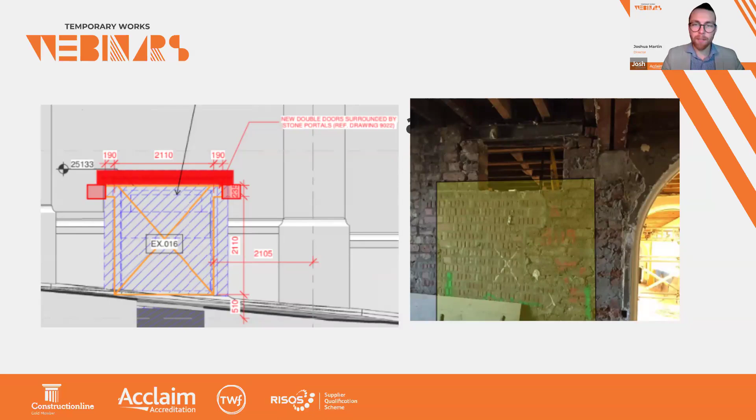So it can be supported in the short term. But why can't we just knock the wall down and whack a beam in quickly? The reason is the beam is usually installed to support the structure above, which could include a wall, floors, beams, roof, arches, or anything like that.

But this comes with quite an important caveat: it relies on the wall above arching over the opening. Masonry is able to arch even though it's just a flat soffit or opening - the masonry will arch around. It's important to understand that for larger openings, or openings where there's not enough masonry around the support areas to enable this mechanism, then this method doesn't apply. This 60-degree zone doesn't apply, okay?

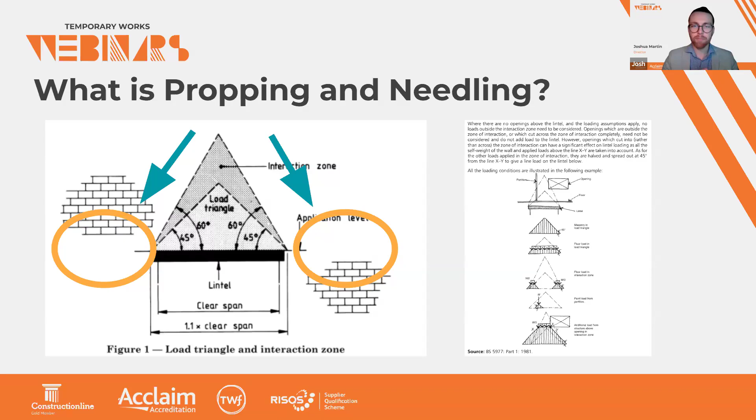Okay, so let's look at the type of things that need to be considered when we are propping and needling. The importance of site investigation is absolutely critical. It's really important that we know what the structure is and how it's currently behaving, so that we can predict what it's going to do.

And it comes down to - yes, we're only less than 20 minutes into the presentation, ladies and gentlemen, but I'm going to say it - it's GIGO, my favorite phrase, I'm afraid: garbage in, garbage out. If the idea of the solution is based on garbage, then the solution itself is also going to be a load of garbage. Proper site investigation is required, and a little thought and money spent at this stage will really make for a much better solution.

Okay, next point, lateral stability. Before the wall is removed, the lateral stability of the propping and the floor itself will need to be considered, yes, support of other structures and not just the wall in question. So don't forget that adjacent floors may need to be supported to remove the live load from the wall and to reduce the amount of loading on your propping and needling. That needs to be taken into account.

Next one, the whole sequence of construction and not just the propping - that's important as well, for a couple of reasons. The very first being the loading of the temporary works. The system needs to be designed for the worst case loadings. Therefore, if the structure is going to be loaded by plant or materials or some kind of storage, snow, potential vehicle strikes during its design life and not just at the time of installation, then this needs to be considered at the design stage.

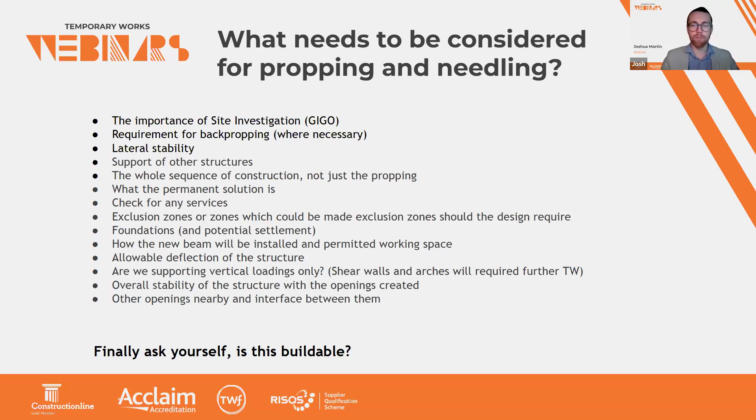And then finally, we need to ask ourselves: is this solution buildable? It's really important that the design from both the permanent works and the temporary works is buildable and suitably mitigates risk using that ERIC principle of eliminate, reduce, inform, and control. Openings in load-bearing structures can go seriously wrong if not carried out correctly, so the overall solution must be safe and the sequence of construction must be practical and be able to be done on site safely. So let's use this example to explore some of those points.

So let's take it through our list. We've got site investigation - we're looking for wall thicknesses.

Layout of the structure, including floor spans and floor to ceiling heights, floor construction, so we know and understand what the load is. What's the floor made out of, and will it be suitable to support the point loading from the props underneath, which leads us on to back propping.

Is it feasible to back prop below? The floor below may well be occupied by a third party or restaurant that is currently open, so we need to make sure that we understand if we can back prop, and if we can't, then that leads us to other solutions.

Lateral stability and the support of other structures. So we have an arch here. Will that be supported by the needling? If the wall is acting as a shear wall to provide that stability to the whole structure, do we need to consider global stability as well as the local stability of creating this opening?

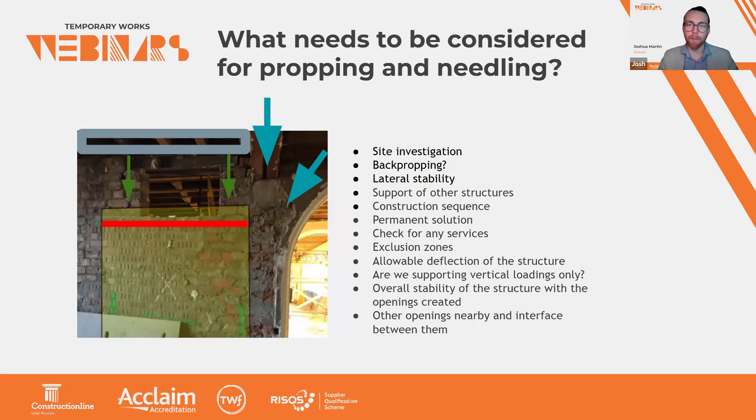There are other considerations that will be project specific, but if you plan ahead and start discussing these concepts and schemes, then the work should go nicely to pick up all those constraints.

So now that we know the types of things that we need to consider, it's time to furnish our temporary works toolbox, an imaginary one unfortunately, with all these different ideas that we can utilize in our project. That way, when a particular solution, challenge or issue comes up, we can already have in mind lots of solutions that we can run through that would work and employ in that particular project.

I was reminded the other day by a colleague of mine that a craftsman may well have some really good and sharp tools, but if they don't know how to use them, then they're going to create something quite blunt and ugly.

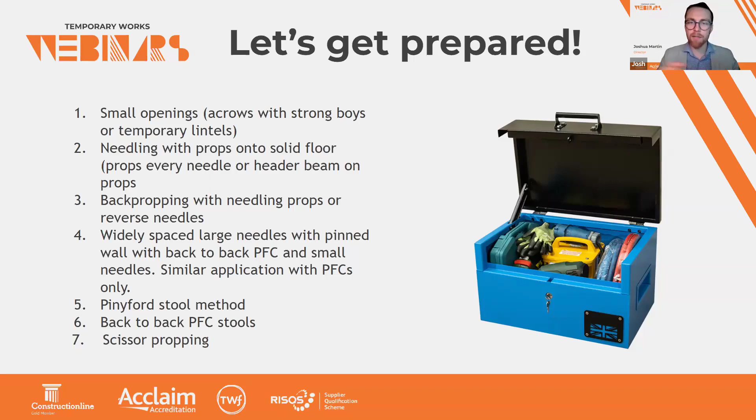As shown on the list here, there are several different types of propping and needling schemes we can employ. Sometimes a mixture between them is most appropriate, but we're going to look at 7 today which are most common. This is more on the domestic side, smaller openings which are quite common. We're talking about a maximum wall thickness of around 230 mil, or double skin cavity wall, and openings up to 2.5 meters or so.

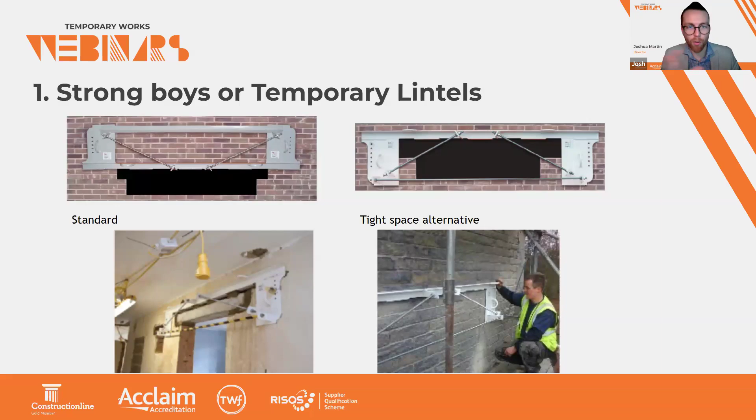The first example is a no more prop solution, or temporary lintel. It's a single tool that replaces the need for multiple Acrow props, saving lots of space on site and site prep time on the ground. It's an off-the-shelf product, great for small-scale applications. It does rely on masonry arching, which we discussed earlier, so it needs to be on a long wall. But it's quite handy in particular examples.

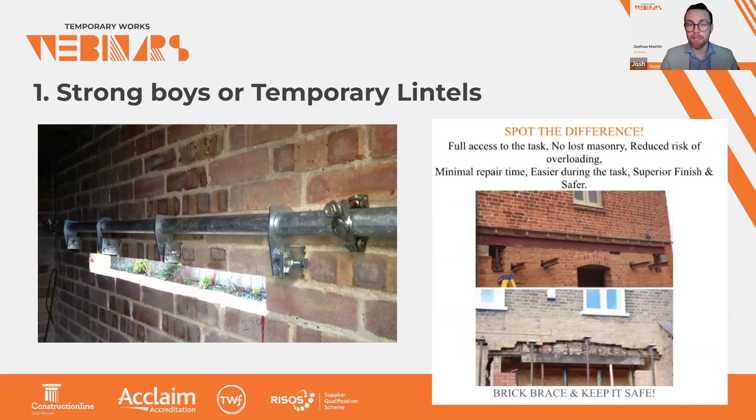Brick brace is a similar proprietary item. It's quite a clever system that effectively uses technology similar to post-tensioning structures. It's like a scaffold tube with fixings at regular centers. Those fixings have plates which go into the masonry vertical joints, which are then opened out with the plates, and which compresses all of that bottom row and creates a deep beam. Essentially, it's quite a clever and neat solution.

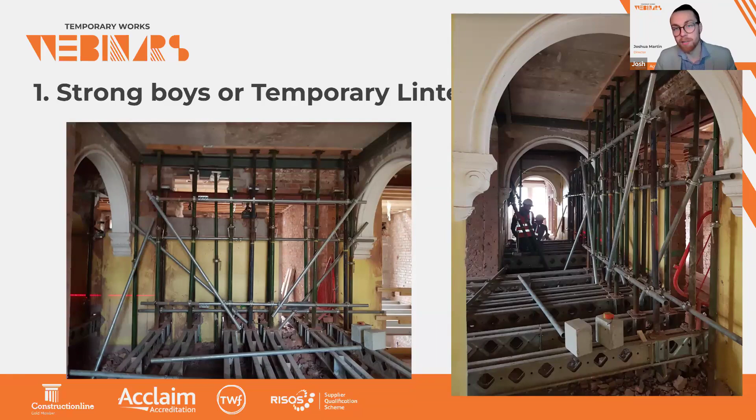And now for the strong boys. These props are for a similar application as the no more props, as the prop head attachment is only good for a safe working load of 350 kg - that's an unfactored capacity of 350 kg. So we're talking quite small scale here, and they're often used at very close spacings because of that limited capacity. We have a steel head plate attachment, cut into the wall at regular centers, supporting the brickwork.

An example of this propping scheme is shown in some of those pictures. The row of props closest to the wall has the head attachments on top, cantilevering into the wall to pick up that wall. The row further away from the wall is supporting the floor above, to remove some of that loading away from the opening, and the loading was only on one side because the floors on the other side of the wall spanned the opposite way.

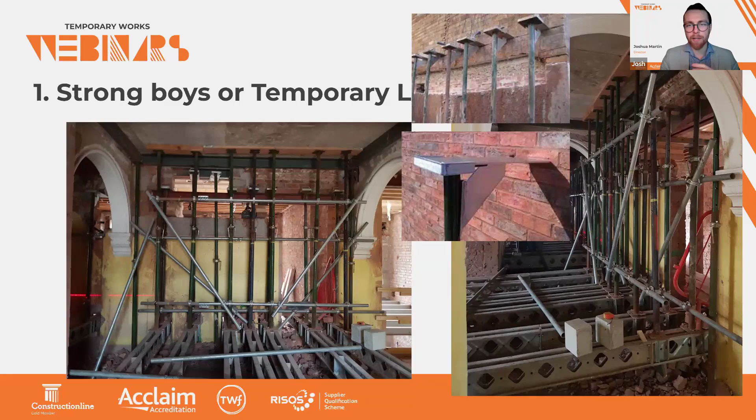The propping was founded on some aluminium beams that then spanned over the floor to put the loading back into the load-bearing wall. We can see these concepts illustrated here - on the left is a simple scheme where the props are supported on floors, and to the right where we've got a very weak floor alternative.

Most often the loadings we get from strongboy props are low due to their low capacity, thus propping down to an elevated floor is usually acceptable, providing a proper load assessment has been carried out and we put some timber scaffold boards beneath. But understanding the floor spans and construction is critical, which links back to that good site investigation. This system is also good because the props are all on one side of the wall, so when you come to put your beam in, you've got one side totally open, and it's easy to use your equipment to get the beam in.

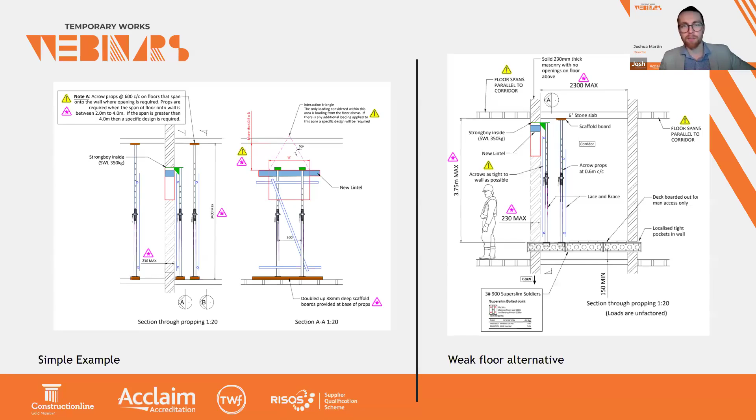If we review that against a typical sequence of installation, which applies for all lintels really - the propping of the opening is installed to fully support the wall. At that point, an opening is made to receive the new beam or lintel, and this doesn't have to be the whole wall - it can just be a slot, just big enough to get the beam in, allowing it to be supported by the pad stones, which are installed as well. Once the beam and lintel are installed and dry packed to ensure it's ready to take the load, the temporary works can then be removed, and the wall demolished. That's the process in a nutshell.

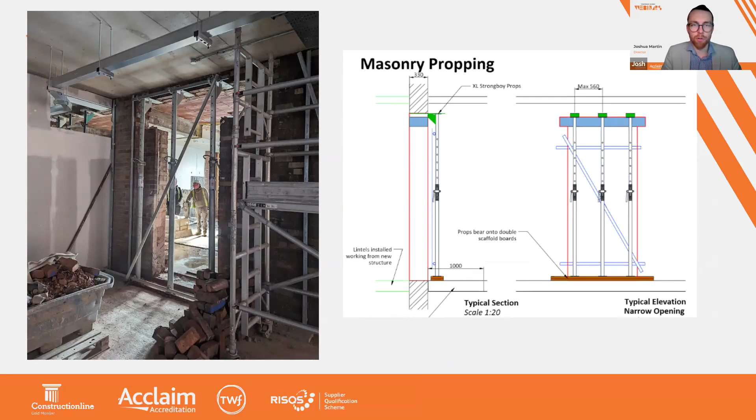Here's an example of that in practice. It's quite a neat solution there. There's a competent team on site: when you look at the drawing and what's been constructed on site, they're pretty much exactly the same. That's a neat solution, a very common practice: Acrow prop, strong boys, and some scaffold lacing to maintain stability.

If we're putting some larger openings together, this could be a thicker wall or higher floor loadings or something similar. We would employ something similar to what's shown here, so we've got larger needles. The needles are the horizontal beams which run through the wall and needle through it. Those beams are size dependent on the load. On this particular item, we've got vertical props coming down at the support of every single needle, so it's regular supports down to a structure which can support the load coming through.

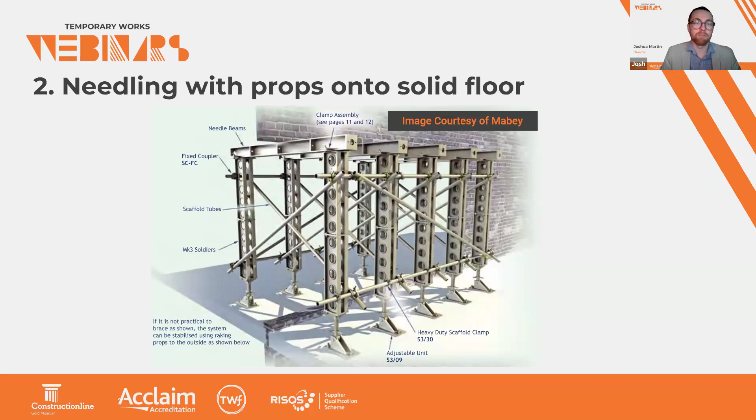The scaffold bracing doesn't have to go through the opening like shown here. Presumably on this schematic that's added afterwards just to provide a bit of stability, because when you're erecting it there is no wall there in place, which is why we can typically put in a raking prop, such as shown on this solution here, just to provide that lateral stability.

An alternative to providing a prop on every single needle is to have a header beam between the two props and to support your needles from those. The centers of the needles remain the same, because it's really important that we pick up the structure at least 800mm to 1 meter centers to maintain support to the wall, so we don't get lots of loose brickwork dropping down. We're providing lots of regular supports, and then we can have a header beam under those needles, with some strong props either side to support those. That enables quite a large opening, which may well be useful as a kind of goalpost solution to allow access or small plant to run through, etc.

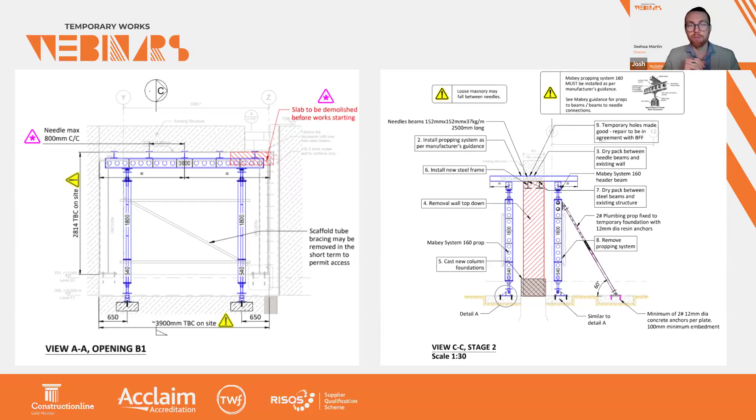If we are propping an opening on a raised floor and the floors are weak, then we can employ something called reverse needling. This scheme takes the load from the wall, distributes it to the needles, into the props, and back into the lower needles, and then back into the wall, just like that.

This is a really great idea, as when we are working on structures and changing how they behave, we try as engineers not to mess around with the load path so much, because we're putting stresses on the structures which we don't necessarily know they've experienced before, which may well lead to cracking that we want to avoid. So if we can keep the structure behaving as it has its entire life during this process of making an opening, then that's a great idea, and that's what this scheme is all about really.

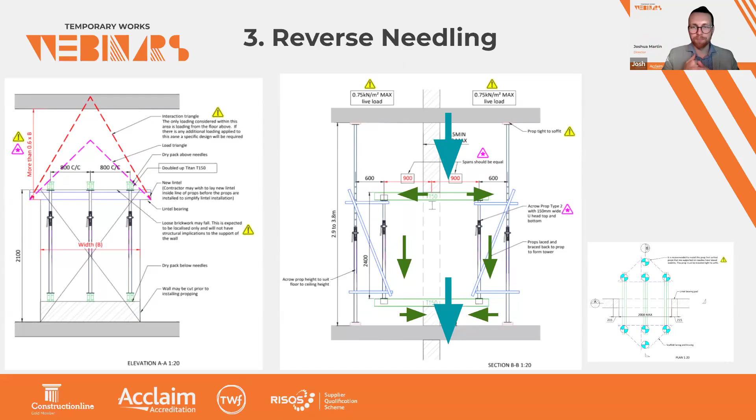So the propping from the floor to the ceiling is used, and that's just for stability really, because we've almost got like a floating frame. The propping is non-load bearing, it's just something strong enough to tie to. It doesn't have to be a prop if there's something nearby, scaffold or something, it's just to provide a bit of stability. So that's a really neat solution, reverse needling there.

Now let's look at needling with larger beams and with a pinned wall. This is a scheme where the loads were really high as we were supporting the whole facade, because the opening was all across the shop front there. The area beneath the propping was also required to remain open to enable the demolition works. Therefore, I developed a scheme that had props at approximately 5 meters apart.

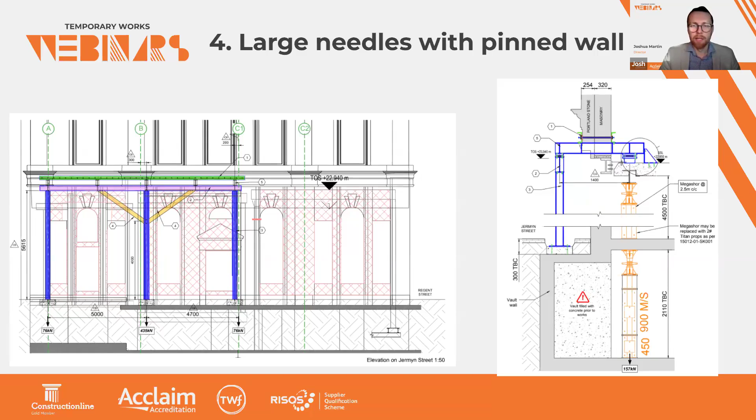Then we had larger needles at 2.5 meter centers, and back-to-back channels spanning between the needles to pick up the wall, which you can see a bit closer here. The PFCs are essentially strengthening the bottom line of that wall and are designed to span between the larger needles. A sleeved rod is inserted through the wall, which then ties the back-to-back PFCs together, a bit like that, which we've got a close-up of those needles and the pins.

It's important that the sleeve is used, as the rods themselves have quite a low bending capacity, and this is quite a high load in a thick wall. So we use those kind of sleeves over the rods just to provide that extra support in bending.

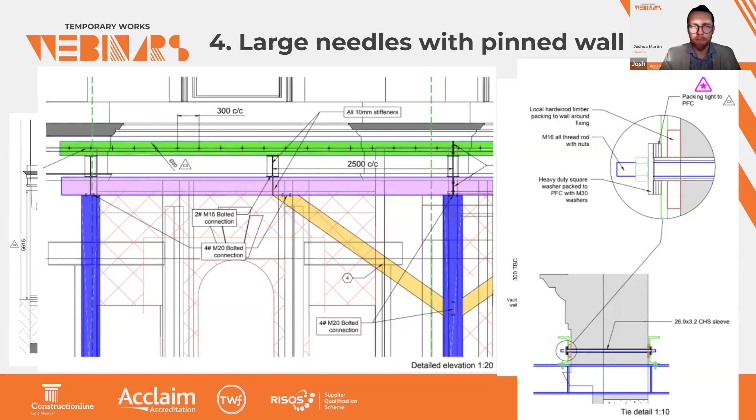Due to the size of the loadings and the quite awkward site constraints, it was necessary to go with a bespoke fabricated steel solution. This PFC pinned solution can also be used to limit damage in the wall, which was quite precious to the client. We proposed lots of different solutions, and they felt this solution was most appropriate to limit damage to the wall, so we could maintain as much of the fancy stonework wall as possible.

Next is the Pinyford stool method, often used for casting an in-situ beam inside a wall over a proposed opening. The illustration shown here is taken from the Temporary Works Toolkit, Part 10, published by the Institution of Structural Engineers. They've got a series of articles, and this one is primarily aimed at assisting the permanent works designer with temporary works issues.

This sequence breaks out in stages how to form a new lintel in an existing wall. The sequence is to break out pockets in the wall and insert small stools, usually steel box sections or cut-down steel I-sections. Once the stools are in and dry packed, ready to take the load and support the structure above, nice and tight, then the lintel channel, which is the extent of where the lintel will sit, is created.

That forms a large slot along the wall, which is then used to form the rebar, and the new lintel is placed inside, i.e. all the steel fixings are carried out. Shutters are placed around the slot and the concrete is cast. The top of the beam must be dry packed so it's tight to the soffit, ensuring it's bearing against the top of the wall with no air pockets during casting. Once the concrete's cured, we can remove the wall underneath, and hey presto, the opening has been created.

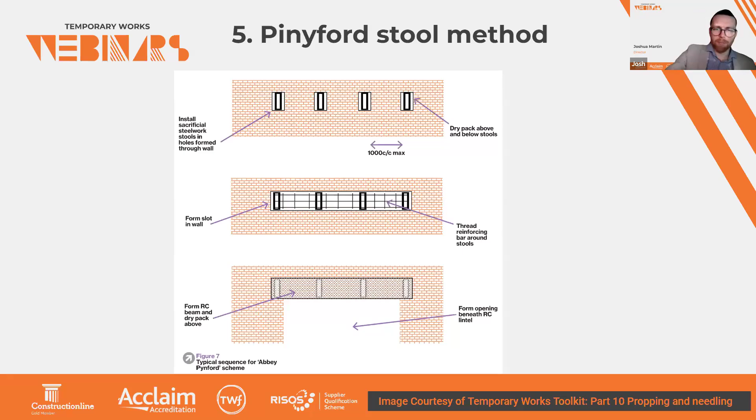I've got an example here of a design where we used the Pinyford stool method during the Low Cross project in East London. We used steel stools designed to sit inside the new lintel and therefore not clash with any of the reinforcement used for the new beam.

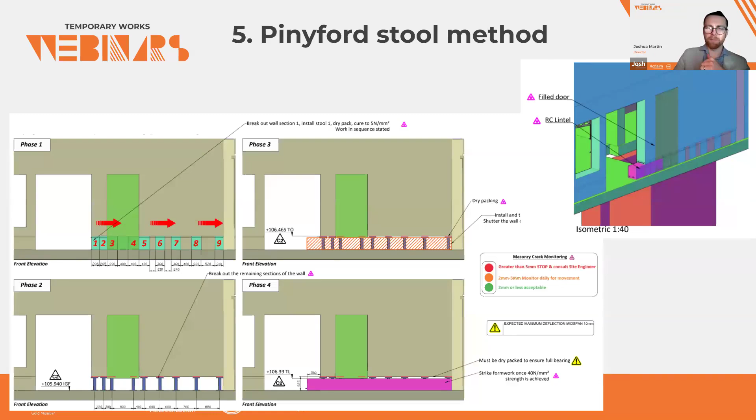The process was, as you can see here, to make the pockets, install the stools, then form that slot, which enables you to put all the rebar in to form the lintel, and then cast the concrete, let it cure, dry pack, and make the opening. It's quite a neat solution. Here's a detailed view of the stools and how they sit around that reinforcement.

It's really quite a niche method, but it's a very handy one to know because for certain challenges or certain requirements, this solution is just perfect.

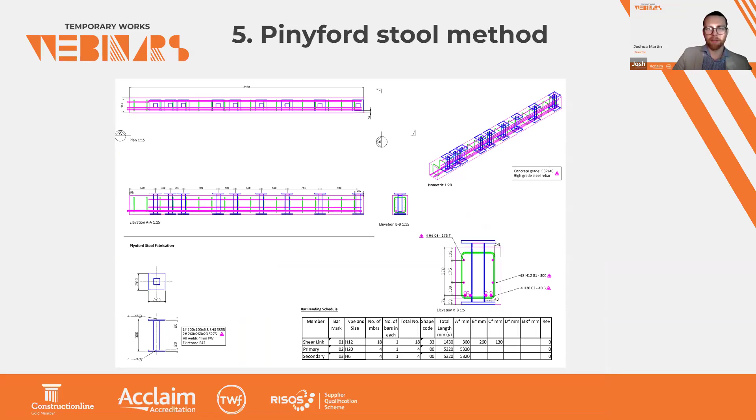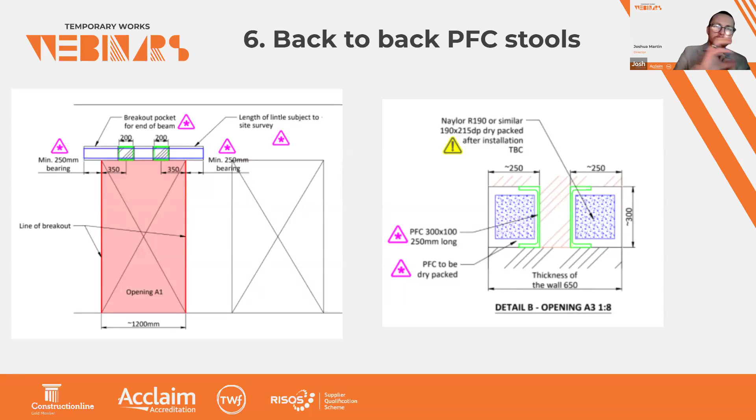In a similar vein to the Pinyford stools method, we can use back-to-back PFCs as little stools. They are very short stubs, back-to-back, and they allow the installation of precast lintels because they sit in the opening that the PFC stool channels provide. Those channels are a perfect shape for that, and they're done one side then the other - handed - and it's a great solution if you've got a number of precast lintels to install because you can do one side at a time.

So I'm going to show you a typical opening and the sequence of the back-to-back PFC stools method. We have a typical opening here, and you can see the load interaction zone and the proposed location of the stools shown in those three hatched blocks. They are short stools - just short sections. If we take a section through this, we can see the sequence of that installation.

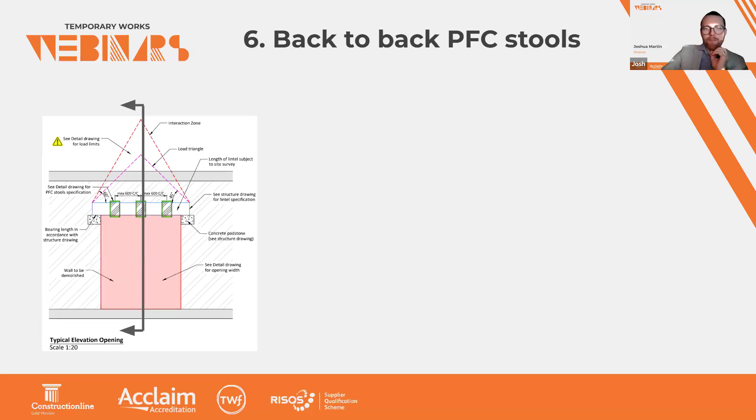The sequence is similar to the Pinyford stools method. However, as this sequence allows multiple lintels to be installed side by side, one side is usually done first, which is then completed and totally load bearing, enabling you to carry out the other side. This ensures that the wall receives as much support as possible throughout the works.

And here's what we do: we break out the pockets and install the stools on one side, then dry pack the stools so they're nice and tight and load bearing. Once they are load bearing, that means we can form a slot on one side of the wall and install one of the lintels. We dry pack that lintel, making sure it's now ready to provide support.

Which means that we can do the same on the other side of the wall, until we've got full support along the whole wall, at which point we can sign off the permit to remove that wall top down, and then we have our opening.

It's a really neat solution. The ends of the steels are usually just cut off or boxed in. But as I say, this back-to-back PFC stool is quite a niche methodology, not very common.

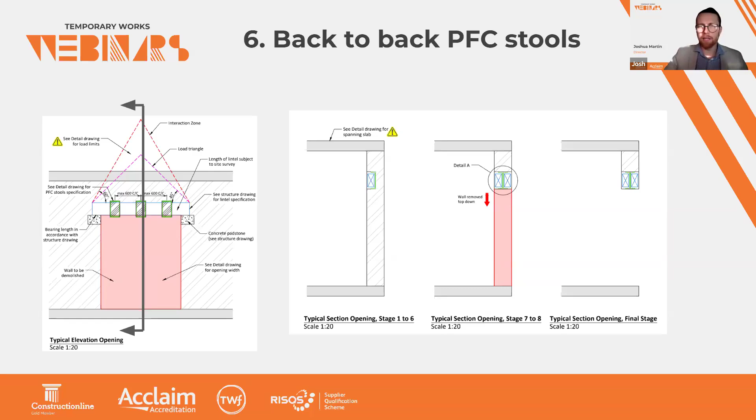Okay, the next solution is going to be explained through a case study: the India buildings in Liverpool city centre. It was a really interesting building, a double-story basement and a number of floors, built in 1931, I think.

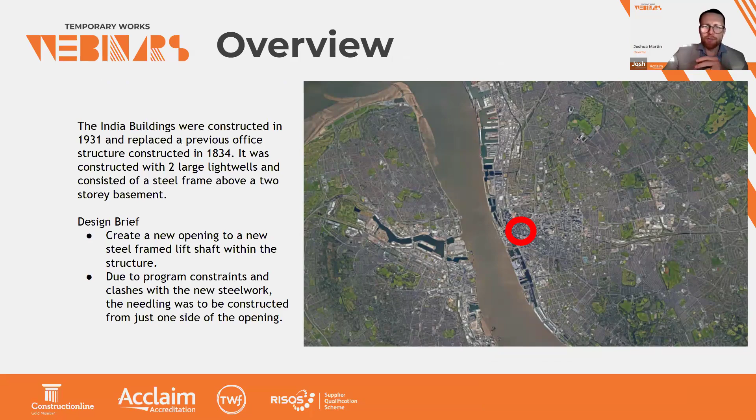The scope was to redevelop the structure in a cut and carve type, creating many holes in walls, which required lots of different needling schemes. The design brief in this area was to create an opening to a new lift shaft, which was being constructed.

The existing floors either side of the opening were also not at the same height, which added further complexity. There are also embedded steel beams within the walls, and due to the construction work going on, it was agreed the best option was a needling scheme which could be constructed and have steelwork installed all from just one side.

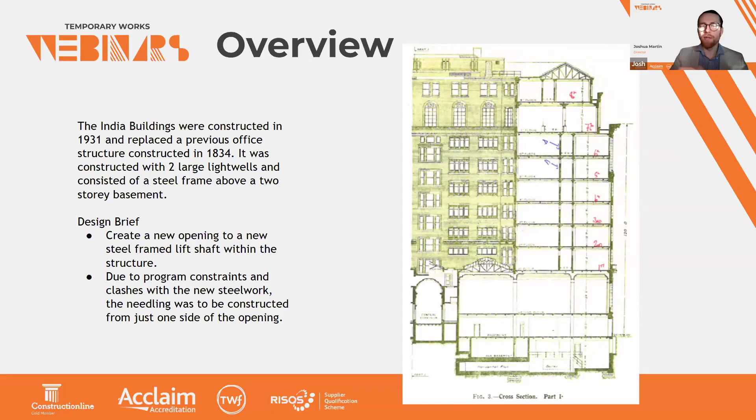This detached this particular wall opening activity from the lift shaft work on the other side of the wall, and effectively removed the link between the activities on the critical path. So there was a bit more going on than just this one opening on this project.

It's a solution which is all resolved within one floor, detaching it from what's going on the floor above and the floor below, providing we're controlling what those loadings are, or we've considered them in our analysis.

The difference between this and reverse needling is that the props are all on one side. We've got a prop very close to the wall, acting in compression, being squashed down, and then we've got a seesaw effect over the top and bottom of that prop. To restrain that overturning over the fulcrum, we need a tension tie at the back.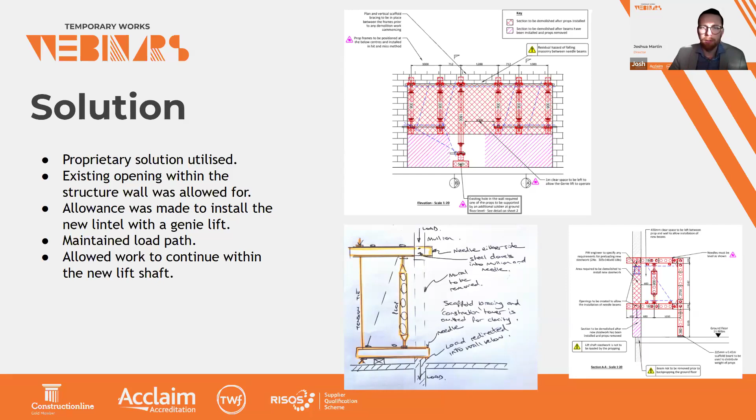Finally, the system allowed work to continue within that new lift shaft, which is really important to separate those two items off the critical path and allow them to progress independently.

And then we've got the structure in reality there. You can see the main load going from the top needle through the vertical props and then back into the bottom needle. There is a strut which comes down all the way across the back, working in compression, going down to the floor below, which enables the system to be constructed because it's essentially a floating support system.

There needs to be some form of support there to enable you to build it. If it's on a relatively flexible floor, then as soon as any load goes down to that flexible floor, the floor deflects, and then the load gets transferred to parts of the stiffer structure, which is the wall adjacent. So it works quite nicely, really.

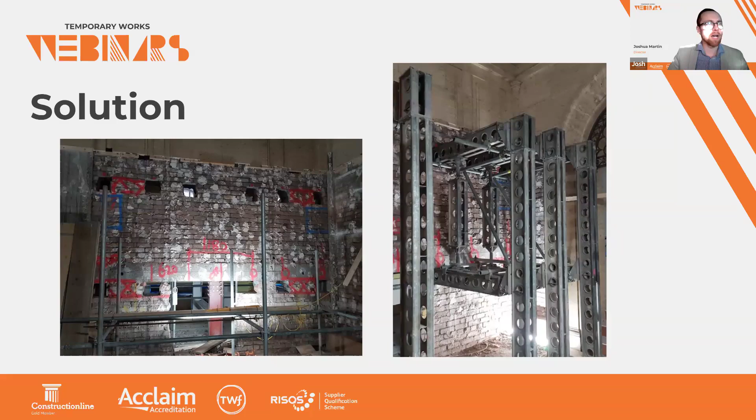That's all of them, the most common solutions to have in your toolbox. Hopefully they're going to help you out on your projects going forward. I'd like to hand you over to Richie, who's going to take us through a worked example, looking at loadings on a particular project. So over to you, Richie.

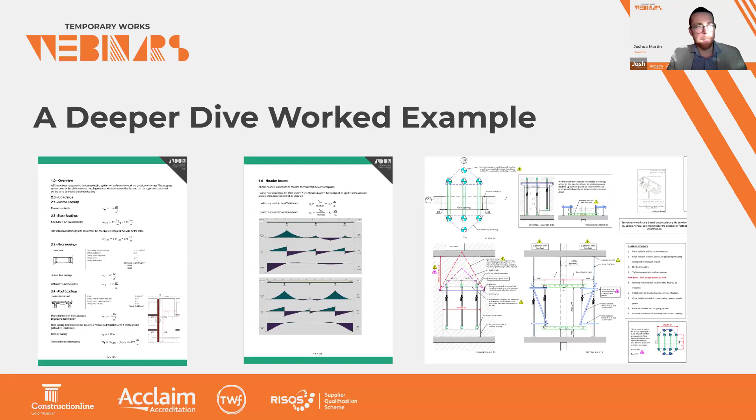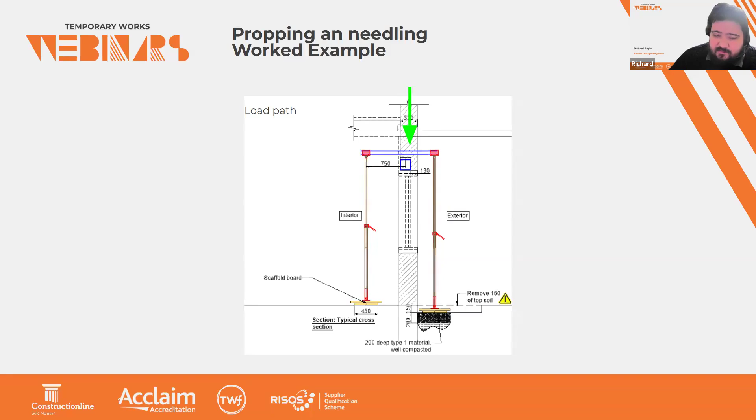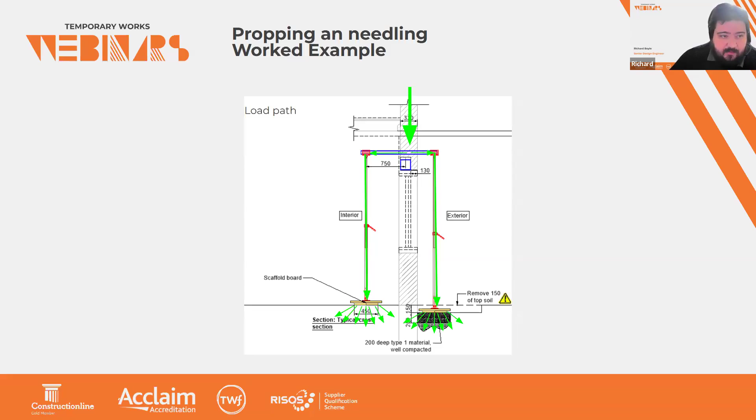It was a project I worked on a few years ago, down in London, where they were making an opening in a wall in a basement, so they needed propping and needling for that. As Josh says, propping and needling is some of our bread and butter, we do it day in, day out. I'm yet to find one identical to one I've already done, but most follow the same broad steps. The basic idea is that the load from the wall goes into a set of needles, and from the needles we transfer that load into props, and then hopefully down to some suitable foundations. These foundations can be the scissor needles or the reverse propping that Josh was talking about, but normally into either a ground bearing slab, some ground, or something along those lines.

In my experience, I've seen a concerning number of examples where people have not designed these propping systems adequately or taken propping seriously. Some of them have been quite horrendously dangerous.

On the left is a residential job in London, quite close to the one we're talking about. They had already installed remedial props when I came to look at it first. But as you can see, they've got a line of needles - if Josh pushes a button you'll see where the needles should have been. There used to be a line of needles going across there, but they put them too far apart, and a big chunk of the wall fell out and lots of needles fell over. It wasn't going well, so they called us to come and have a look, and we had to redesign the whole thing and get a lot of remedial props in there.

The second one is a larger scale project in North Wales - a cut and carve job. There were some strongboy props, and as we spoke about earlier, they can only take about 350 kilograms, but this was supposed to hold up a major load-bearing wall in this building. An eagle-eyed TWS from the adjacent job noticed that it was not going to hold up that wall if they made that opening. You can see they'd already started the works, so it was good that he spotted it when he did, otherwise that could have run into some serious problems.

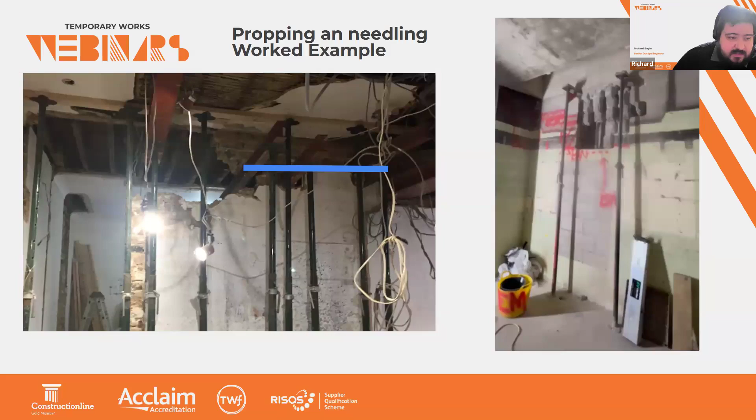But on to what I'm actually going to be talking about today. I'm going to take you through a set of calculations for how we would typically design propping and needling jobs for a wall opening. The first thing we have to calculate is the loads on the new lintel level - the loads that the needles will actually be taking, and then the lintel will be taking afterwards.

In this example, just imagine we're making a wall opening in a masonry load-bearing wall. We're not at the edge of the structure, and it's a masonry wall in good condition. We're not going to look at the extra things that add levels of complexity to the job.

In this solution, we spoke about load triangles and interaction zones before, and the natural arching of the masonry that takes the load away from these triangles. So when doing this, all you have to consider is the loads inside these triangles when it's in good condition. In the load triangle, shown there at 45 degrees, we take into account the actual weight of the masonry of the wall. In the interaction zone, we don't take into account the weight of the masonry - we only account for the loads applied from floors or things like that.

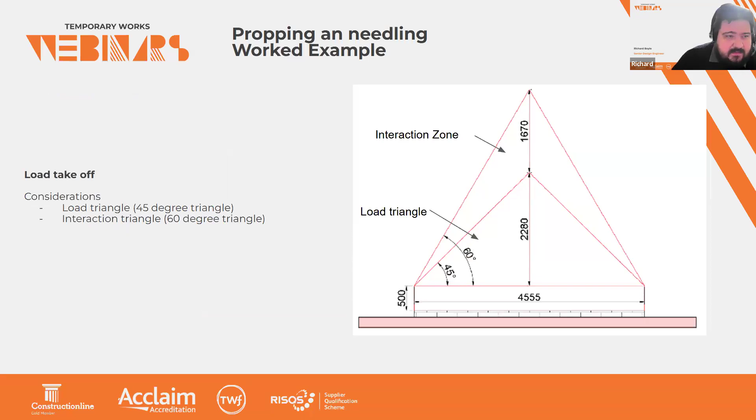If you go back a bit, Josh, before you move on, the actual opening was about 4 meters, and the load triangles are a bit longer than that there, just an extra 10% or so, so that we can take into account the arching over that as well. You can move on now, Josh.

In the load triangle, the load triangle is at 45 degrees. The floor loadings in the load triangle, you have to take into account the live load, any other live loads you've got going on, if there's any plant moving around in that load triangle. In this case, there is a floor at 500 mil above where we're putting in the lintel, so we had to include floor loads there. There was a live load in it, although in most cases we would recommend an exclusion zone being there while these works are carried out.

Not vital, but best practice to just make sure that no one's walking about on these floors while these works are going on. In other cases, you have to take into account environmental loads. This was all inside, so there's no snow loads or anything like that on this. And of course, the dead load of the floor needs to be taken into account.

Other loads are point loads, openings, beams. In this case, there was none of these, but any partitions would add on additional loads. The openings, if any corners of openings are in the load triangle, you have to account for them, because the arching effect brings the loads from that opening to a point load in the corner, and that loads the system from there. So that's the different kinds of loads in the load triangle.

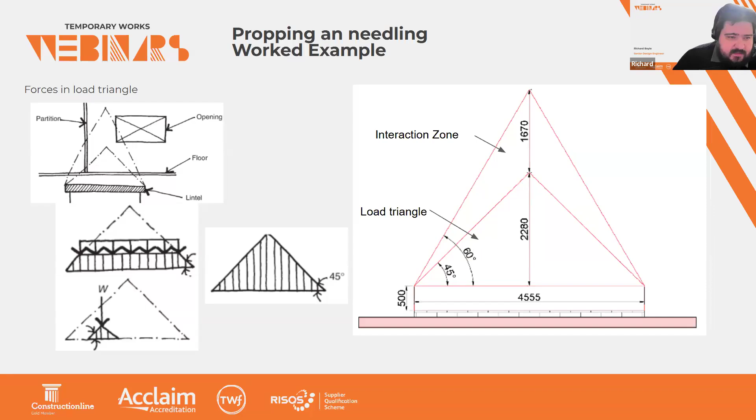In the interaction zone, you've got mostly the same kind of loads, but the loads are halved. So instead of having the full floor loads, you have half of the loads, because it's outside of that direct loading triangle. And again, you've got the partition loads, openings, and beams - you have to take these into account. They're the things that can really cause some complexities to arise when you're doing these designs.

But in this, you still have to take into account the openings in this area where the corner is applied, as it will load your lintel level. If the opening corners are outside the interaction triangle, you don't need to take them into account. It's only when the corners are actually in the interaction triangle or the load triangle that you have to take them into account.

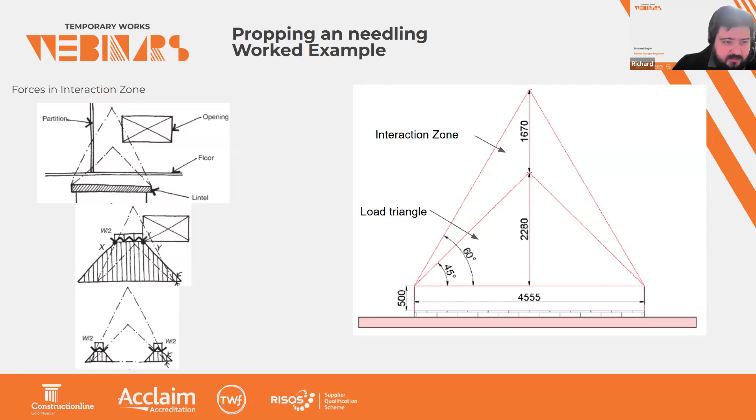So the loads on the lintel that we're actually talking about - as I said, masonry wall and floor loads are all we're going to be talking about in this. So basic things from the structure: the wall was quite thin, 214 mil.

We've allowed for an additional 500 mil of masonry straight above the lintel, just because that brought us up to the floor level, so before the load triangle kicked in. The density of masonry, it wasn't just typical masonry, it was 19 kilonewtons per meter cubed. So the load from the masonry - you've got the height of that triangle times the density of masonry times the thickness of wall - gets you to about 9 kilonewtons per meter, and that is a triangular load in the shape of the load triangle there.

We also had a UDL from the 500 mil of masonry we took into account. We add that on as just a safety buffer in this situation. And of course, we've got the loads from the floor as well, so we've got live loads on it. People were still working upstairs, so we had to take that into account. Dead load of the floor, just a typical timber floor, so just 1.5 kPa.

And the span of the floor was 3.5 meters on both sides. It worked out as 3.55 meters loading the actual wall that I was looking at. So the UDL from the floor loads is a lot higher - it's 12.5, and that loads the whole lintel. If that was in the interaction zone at all, that load would have been halved. But the way that we set up this load triangle, it was all in the load triangle at the very bottom, so it was the full 12.5 kilonewtons that was loading it.

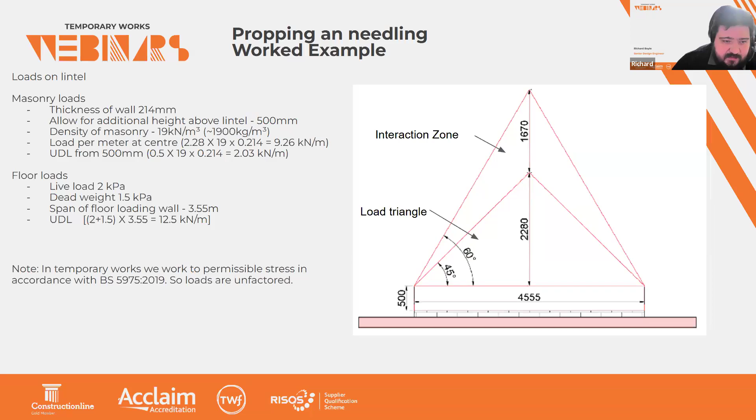Moving on to the design stage, now that we have the loads, we can apply them to the level of the lintel, and this is where the actual design process comes in. You have to determine how many needles you're going to need to support this. In this case, it was the spacing that was the main determiner, so these are at about 910 millimeters apart. If you had one more, they'd be too close together to work properly. If you had less, they'd be too far apart. So we went with 6 needles like that.

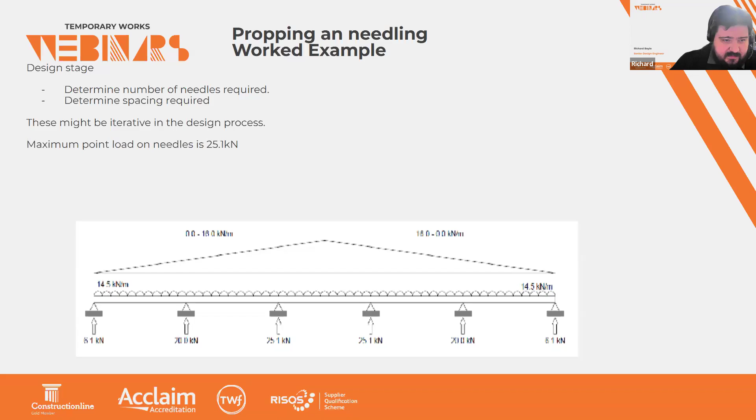From this loading diagram you can see that the maximum load on the needles was 25 kilonewtons, which is a substantial load. No strong boy system could take that by itself, so it was definitely a propping and needling system that was used. In between those needles, some masonry might fall out. That is a residual risk because the spacing is about 900, and that's bigger than a single brick.

Moving on to actually checking the needles, we've positioned the props asymmetrically to allow space to work between the interior prop and the wall. This changes the loading on the needle slightly, but it was more than worth it so that we could have that extra space. So we designed the needles.

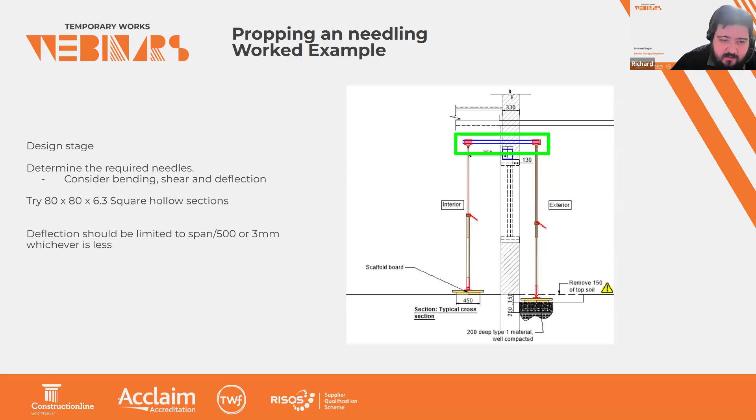In this case, it was just square hollow sections, and we were considering bending, shear, and deflection. The deflection was a critical case in this by a long way. The deflection drove the entire design of these needles, and we limited deflection to 3 millimeters, although it would have been limited to span over 500 on the masonry anyway. But the 3 millimeter limit was to avoid the masonry cracking from above the lintel level.

Now, going on to designing the props, because we loaded it asymmetrically, one prop takes a greater load than the other. From this, it wasn't much of a difference between the props - they're not hugely out of sync. So it was about just under 15 kilonewtons on a single prop, and the height was 2.75 meters. So a single Acrow prop for each side of the needles was more than suitable for what we needed.

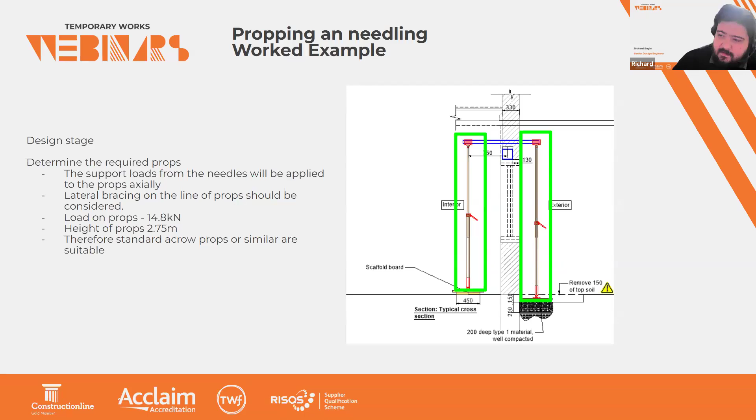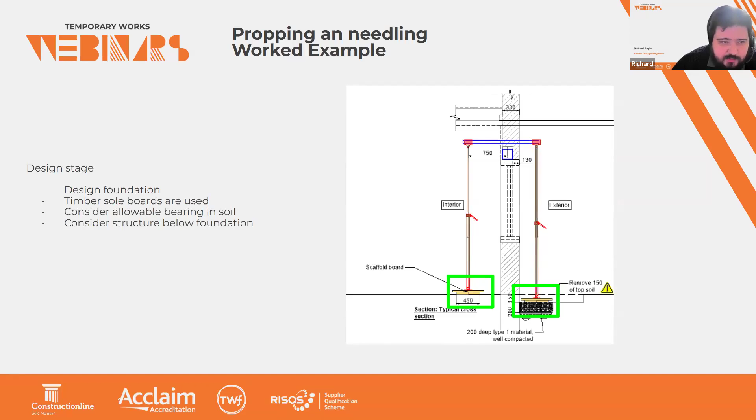After that, if you follow the load down, you get to the ground level. In this case, the inside load was just on a concrete ground bearing slab. Because the loads are so small, 15 kilonewtons, we could tell that was going to work anyway. But on the exterior, the load was into old garden soil. There was a roof extension built above that, but it wasn't taken into much loading. So we removed the topsoil and then put down some sole boards to make sure we had adequate bearing. We considered that the bearing at the bottom of an Acrow prop would give a pressure of about 500 kPa. If you put down a couple of sole boards, you get that to within an acceptable 150 kind of range. That is the basic process for how we do it, and some numbers to go with it.

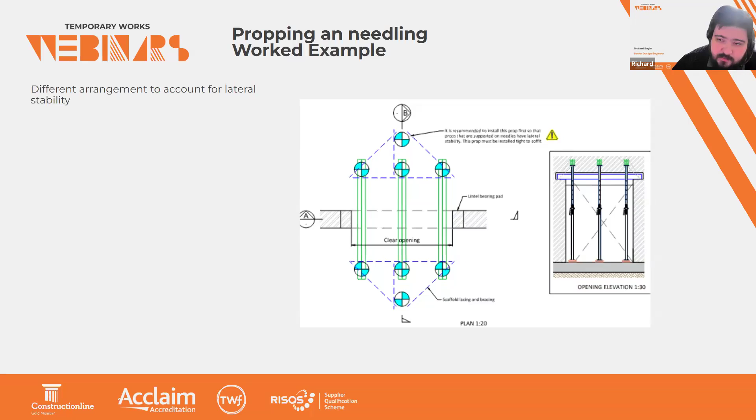And then, of course, once the propping is safely installed, you can break out the wall and put in the lintel. And I think that's it from me. So I'll hand it back to Mr. Josh. Thank you, Richie. That really takes us to the end of our webinar today.

Richard mentioned BS 5975. That is the go-to British standard for temporary works, permissible stress design, and that's the majority of that British standard, which hasn't been superseded by Euronorms. The majority of it covers procedural control of temporary works, which is a whole other subject for a whole other webinar. We've got videos on that on our YouTube channel.